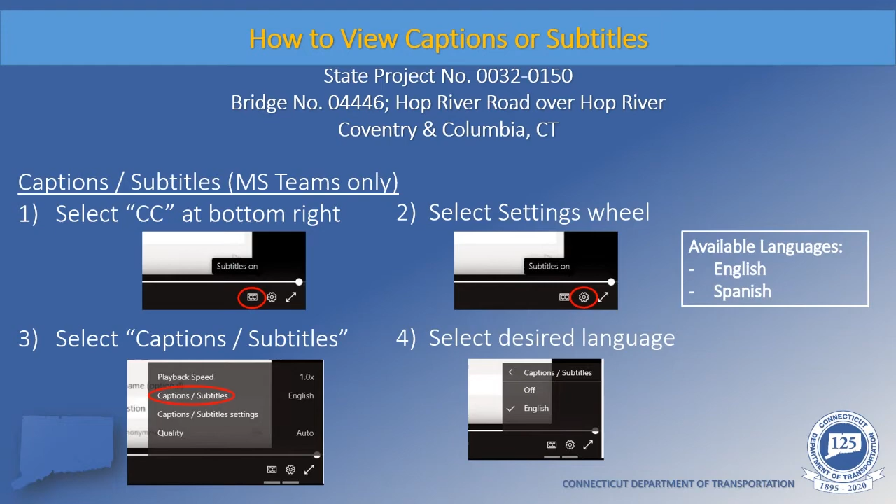Good evening, ladies and gentlemen. On behalf of the Connecticut Department of Transportation and the towns of Coventry and Columbia, it is my pleasure to welcome you all for attending this public informational meeting for State Project number 32-150, replacement of bridge number 04446, Hop River Road over Hop River, located in the towns of Coventry and Columbia. My name is Preeti Bhardwaj, and I am the project manager assigned to this job.

I am joined here this evening with my design staff, along with the towns of Coventry and Columbia, since this is a border bridge, to discuss our design proposal, which has been completed to a 30% level. We hope that you will find this meeting both interesting and informative.

I would now like to explain the format and agenda for tonight's meeting. I will be explaining how you will be able to interact with the project team. I will be explaining how this project is funded in the Federal Local Bridge DMS, or Design Managed by the State program. We will have some welcoming remarks by the town of Coventry. I will be introducing the project design team, and that includes the department's front office leadership, the department's design team, and our consultant liaison engineer team.

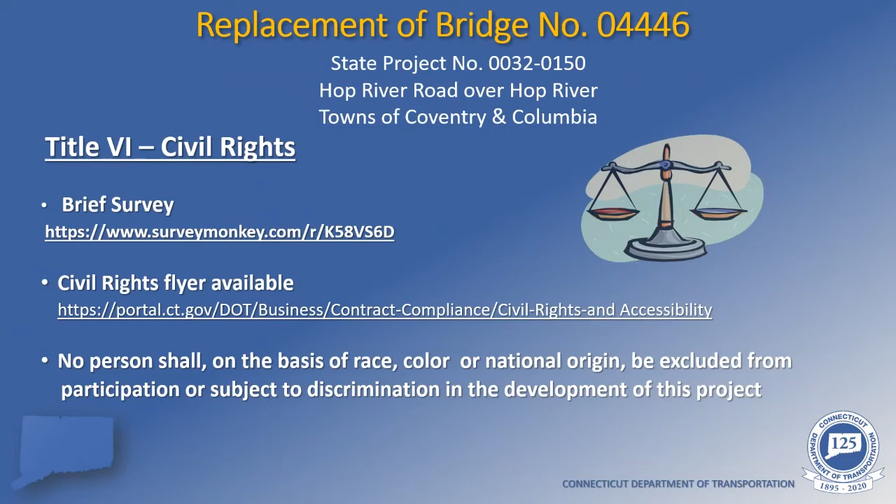I would now like to explain how this project is being funded. This bridge is a town-owned bridge and is being funded under the department's federal local bridge program. Traditionally in this program, the town selects a designer, and because federal funds are involved, the department provides administrative oversight because the department is considered to be stewards of those federal funds. The funding is traditionally 80% federal and 20% town for the design, rights-of-way, and construction phases of the project.

However, this project is going to be funded under the department's newly launched DMS, or Design Managed by the State program. In this program, it will be the department who will be performing the design on behalf of the municipality, utilizing our consultant liaison engineers, who in this case are Close, Jensen, and Miller. Close, Jensen, and Miller has completed the 30% preliminary design, and it will be brought to final design completion by one of our pre-selected task-based designers.

In addition, the design phase only will now be funded with 80% federal and 20% state funds. So the entire design phase is at zero cost to the towns of Coventry and Columbia. Although the 30% preliminary design was performed by the department, it was in full partnership and coordination with the towns of Coventry and Columbia. We held several meetings with both towns and diligently worked together to incorporate most of the town's comments and concerns. And now we are reaching out to you, the community, to also weigh in.

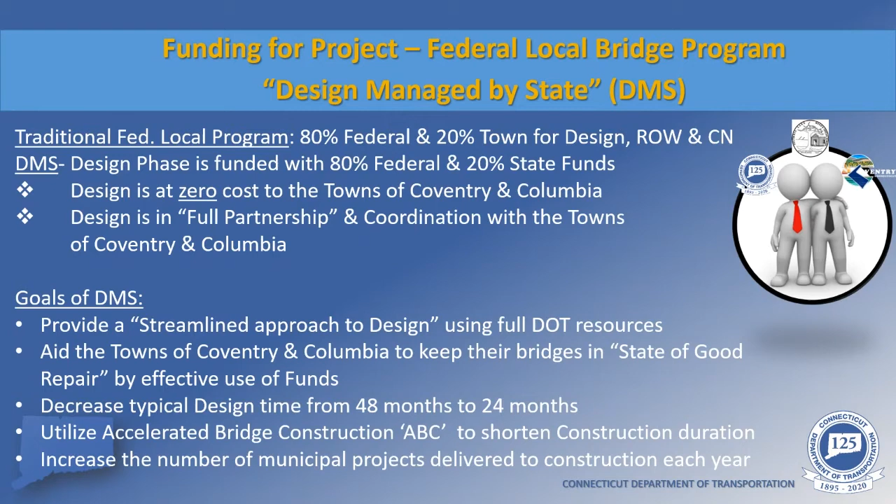Hello and good evening. I'm Todd Penny, the town engineer and wetlands agent for the town of Coventry. I am serving as the project liaison for both Coventry and Columbia for this project, giving my expertise and experience with these types of federally funded transportation projects. It's my job to coordinate with ConnDOT and Close, Jensen and Miller throughout the project and make sure the goals of each community have been met.

ConnDOT performs safety inspections on all bridges over 20 feet in length at 2-year intervals. The inspection reports for the Hop River Bridge identified several costly maintenance repairs, including bearing pad replacements, deck drainage, approach retaining wall voids, partial repaintings, along with other necessary repairs. While these deficiencies do not result in immediate dangers to the traveling public, their repairs are expensive, and the two communities have been searching for state and federal funds to assist in implementing the repairs since 2013.

In December of 2018, the towns made an application for the 2019 Federal Local Bridge Program for the bridge's replacement under the qualification of the bridge's functionally obsolete rating, a 1-lane bridge for a 2-lane roadway, along with the inspection report repairs. We took this approach as the required 20% municipal match for the replacement of the bridge was comparable to the local funds needed to repair the existing 1-lane structure.

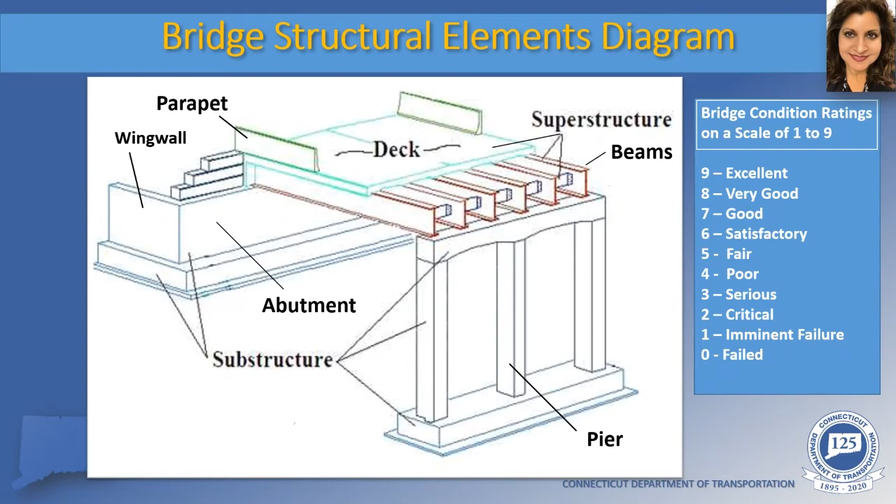Now that you are armed with basic bridge knowledge, I would now like to introduce Mr. Daniel Carnine, who will be presenting the technical portion of the presentation. Good evening, my name is Dan Carnine from Close Jensen Miller. I will present the technical portion of tonight's presentation.

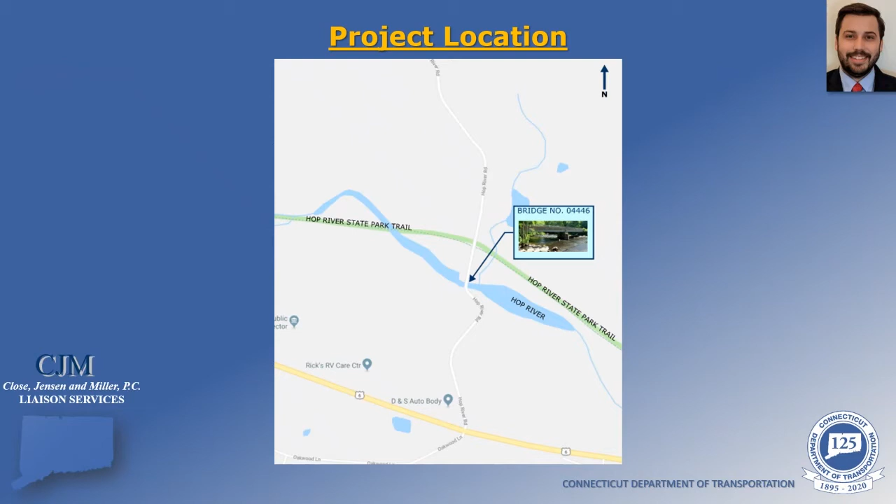Bridge number 4446 carries Hop River Road over the Hop River. The bridge is located 0.3 miles north of Route 6 on the Coventry-Columbia town line. Here's an aerial view of the site with the bridge in the center. On top to the north is a parking lot to the Hop River State Park Trail. To the west, upstream from the bridge, is a dam. And to the southwest, the Hop River Dam tail race branches off the river, then continues east under Hop River Road.

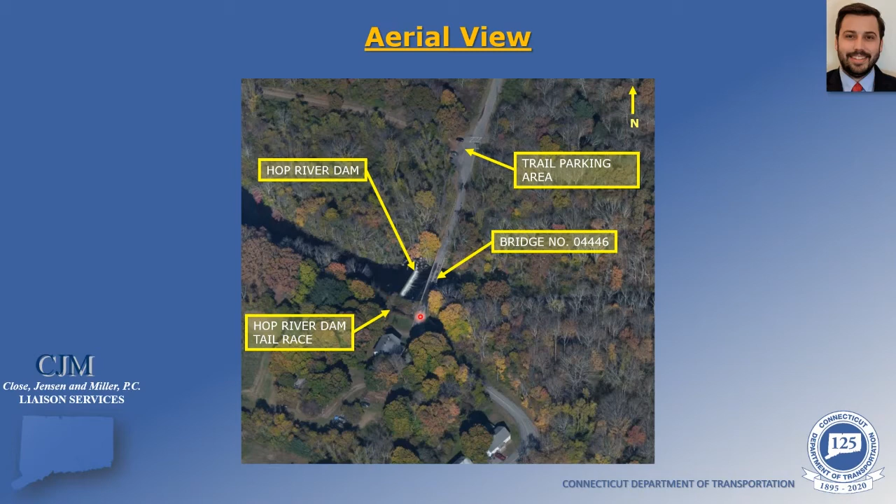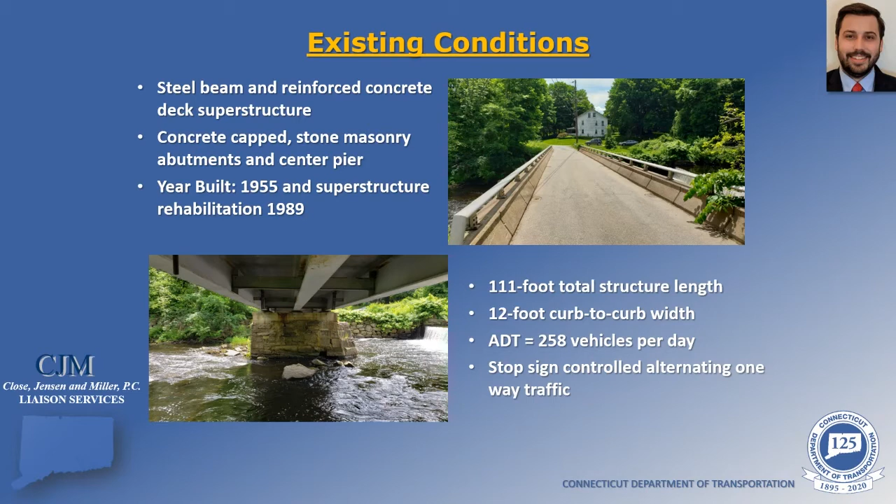The existing bridge consists of steel beams and a concrete deck superstructure supported by stone masonry abutments and a center pier. The bridge was originally built in 1955 and rehabbed in 1989. The structure has a total length of 111 feet and a curb-to-curb width of 12 feet. There are stop signs at each end of the bridge providing alternating one-way traffic.

The deck, which was replaced in 1989, is in good condition overall with minor deterioration. However, the deck width is functionally obsolete since it is too narrow for the current average daily traffic.

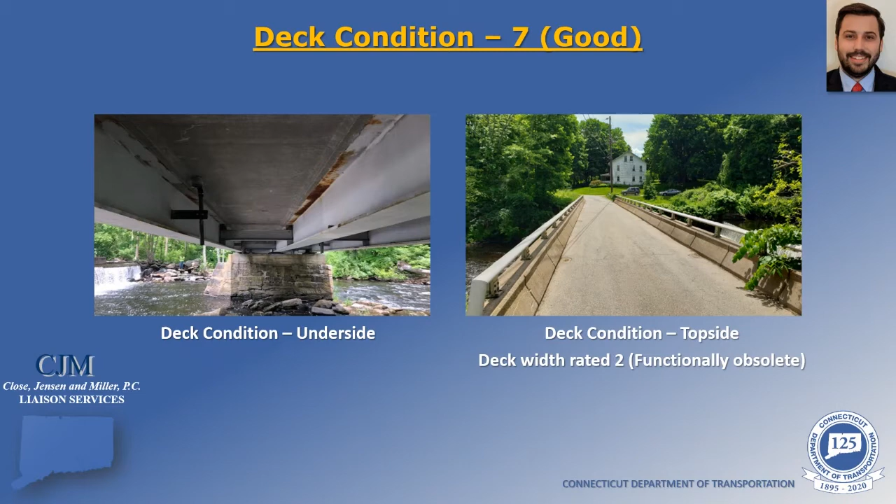The superstructure is in fair condition overall, with some deterioration in the beams. However, the existing steel expansion bearings are structurally deficient, show heavy signs of rust, and warrant replacement.

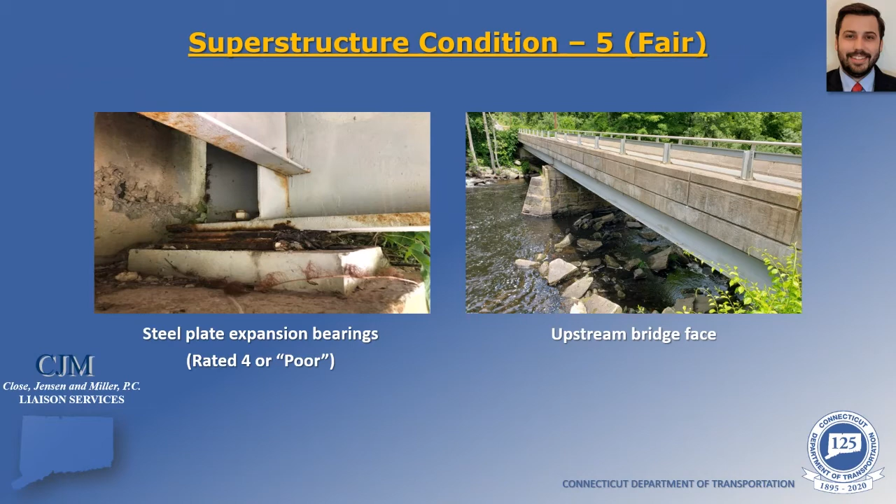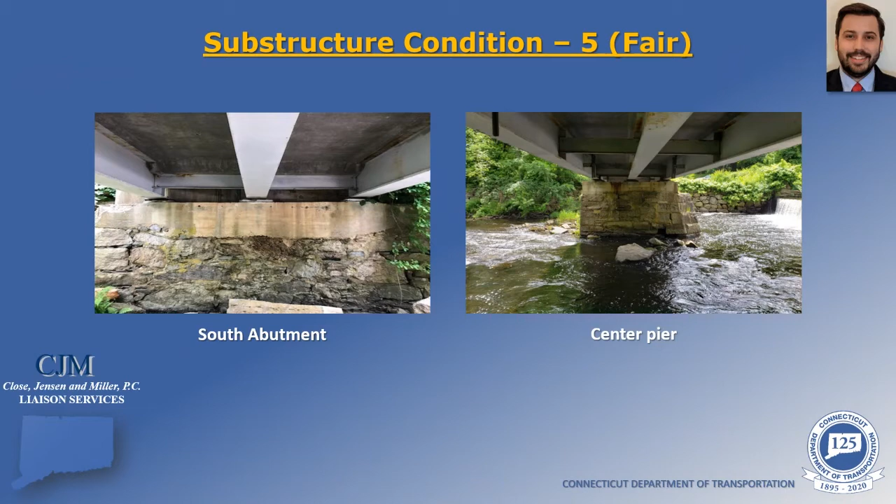The substructure is in fair condition, with some deterioration and voids in the stone masonry. Here you can see the typical substructure condition, with the south abutment shown in the left picture and the center pier shown in the right picture.

Due to the functionally obsolete deck and deteriorated bearings, a full bridge replacement is required. The bridge will consist of a steel multi-girder superstructure on integral abutments.

This is an elevation view that shows the side of the proposed bridge. The span will be increased to 130 feet to allow construction of new concrete abutments behind the existing stone masonry walls. The top portion of the existing abutments and a small portion of the stone masonry walls will be removed to make room for the new superstructure.

The existing stone masonry pier will remain, but a new reinforced concrete cap will be constructed on top of it. On the left of the screen, you can see the culvert that carries Hop River Road over the mill tail race stream, which will be replaced with a precast concrete box culvert.

On top of the bridge, open metal bridge rail will be used across the structure and terminate into reinforced concrete end walls at all four corners of the bridge.

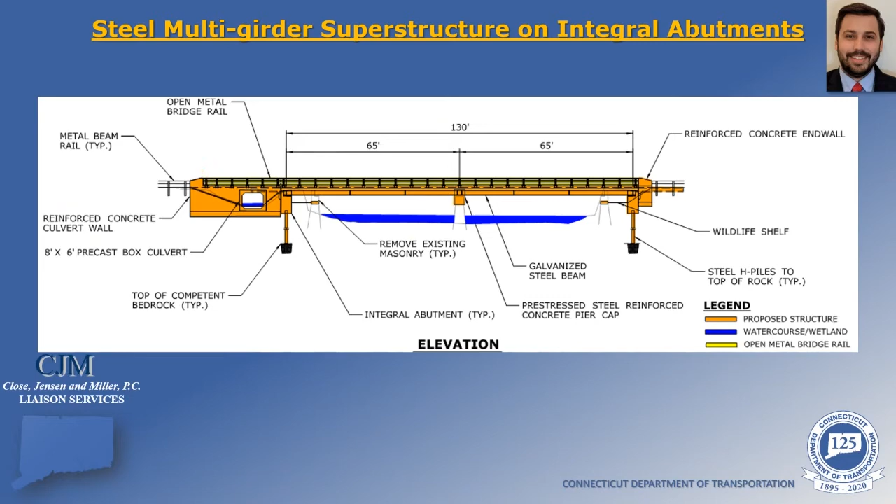The reinforced concrete end walls located at all four corners of the bridge will be covered in stone facing. Here are two pictures from recent projects to give you an example of what the end walls would look like.

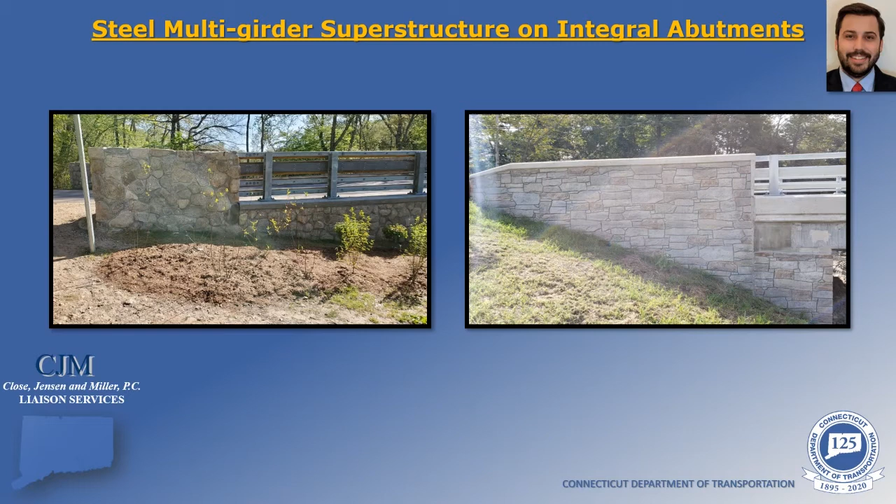Here is a cross-section cut of the proposed bridge. The road will be widened from 12 feet to 24 feet to allow 2 lanes of vehicular traffic.

On top, in yellow in the picture, open metal bridge rail will be installed across the entire structure. Below that, you can see the concrete deck in gray and the steel beams in orange.

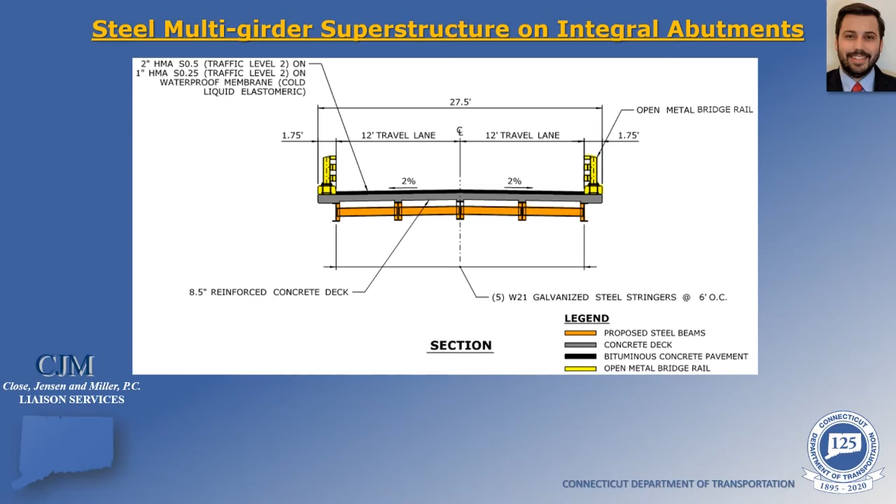Here are pictures from some recent projects to give you an idea of what the proposed superstructure would look like. The top photo shows steel beams covered in a galvanized coating, and the bottom photo shows open metal bridge rail.

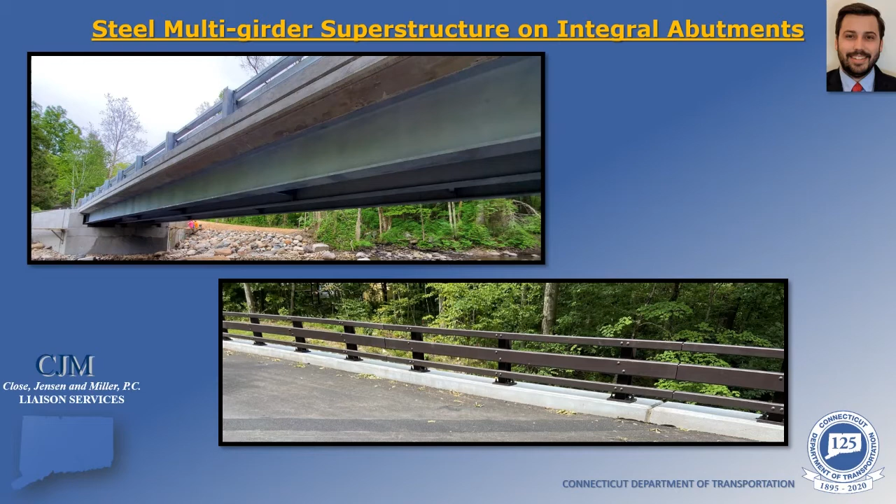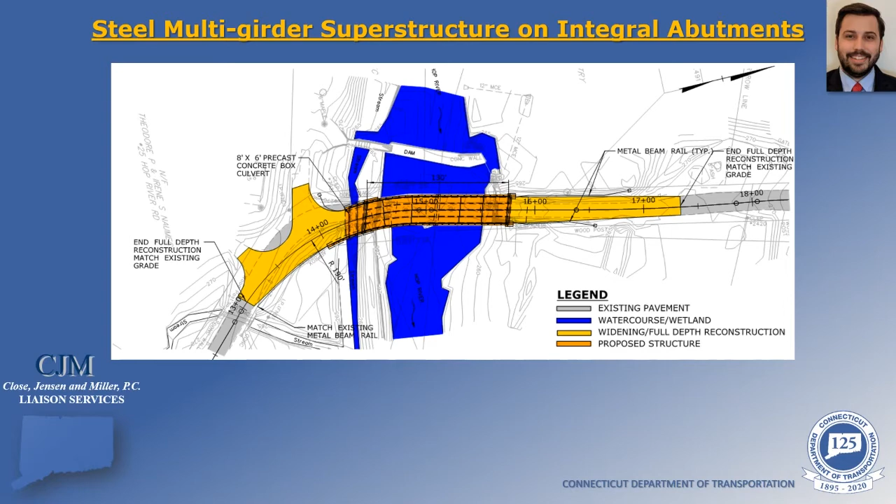The roadway profile for Hop River Road will be slightly modified to allow a slight slope across the bridge. Some fill will also be placed on the north approach to reduce the sharp angles and bumps.

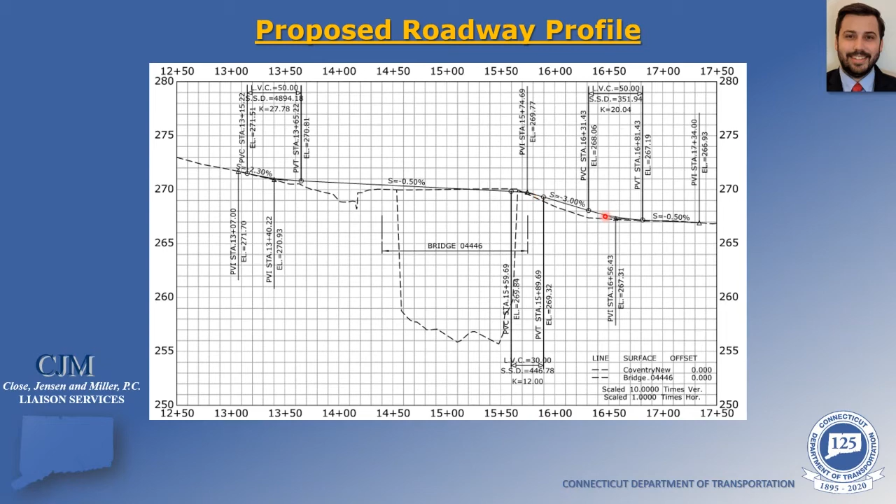There are overhead utilities over the bridge, shown here in red. They will be temporarily relocated during construction, and we do not anticipate any interruptions to power, phone, cable, or internet service throughout construction.

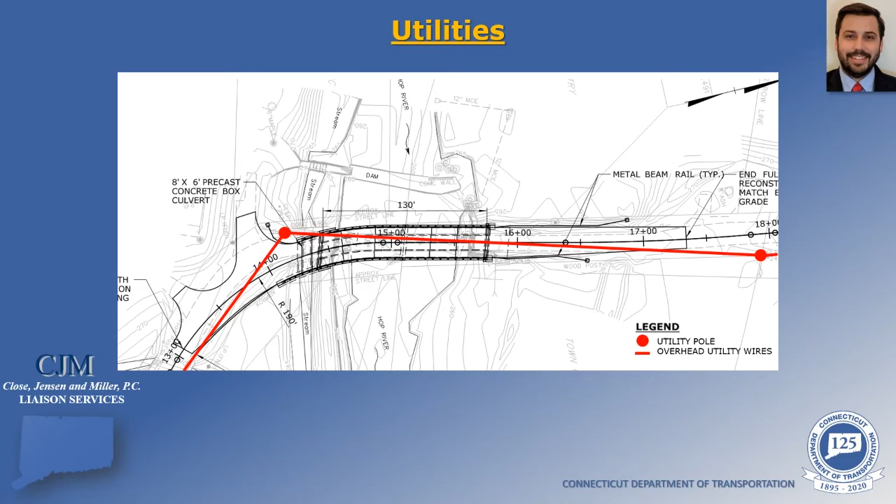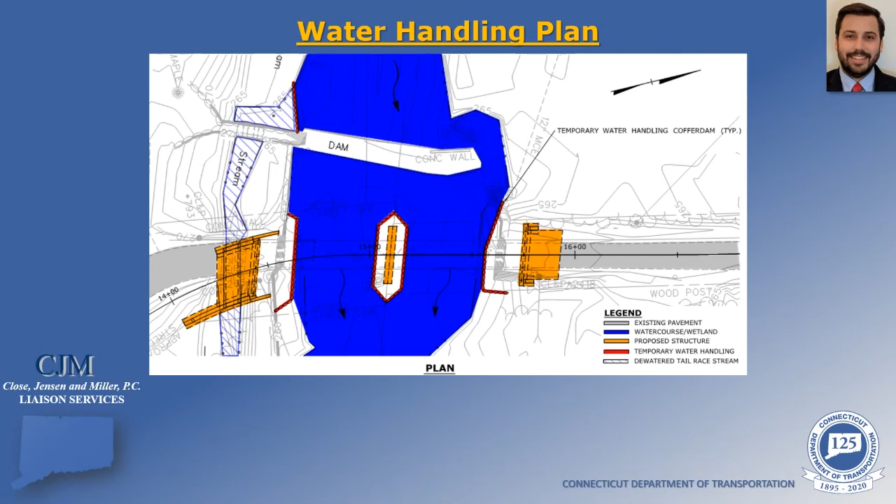During construction, temporary water handling sandbags will be placed around the existing substructure, and impacts to the river channel will be minimal. Sandbags will also be installed at the inlet for the tail race, and the stream will be dewatered for 1 to 2 weeks to allow for the replacement of the culvert.

Construction will utilize a 6.8-mile detour consisting of state and local roads. Vehicles following the detour from Hop River Road would take a left onto Route 6, a left onto Pucker Street, a left onto South Street, a left onto Bunker Hill Road, then a final left back onto Hop River Road.

Access to adjacent driveways will be maintained at all times throughout construction.

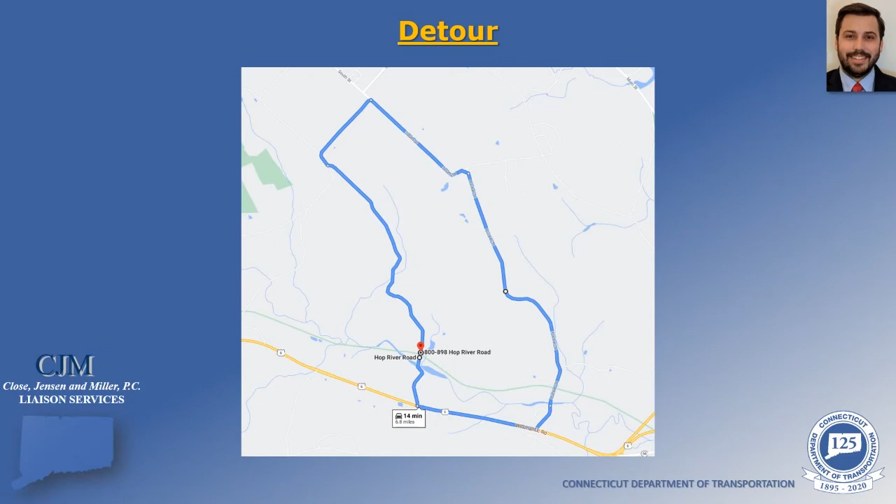Because of the roadway widening, permanent partial takes, shown here in red, will be required to the north in Coventry and to the southeast on the Columbia side.

Temporary construction easements, shown in green, will be required from private property for certain construction activities like the installation of sandbags at the millstream inlet. The rights-of-way process is just beginning, and DOT rights-of-way will explain this process more later in the presentation.

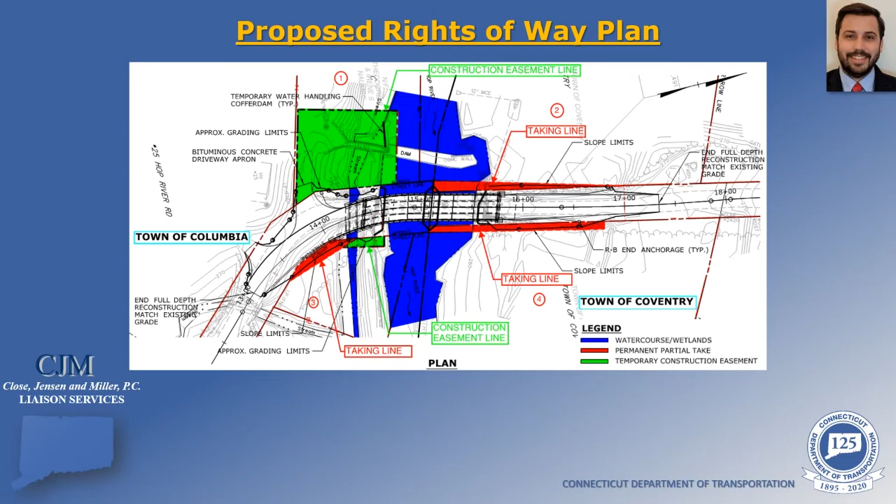We will obtain all necessary permits for this project. We anticipate obtaining Coventry and Columbia Inland Wetlands permits, Army Corps of Engineers general permit, and a flood management certification.

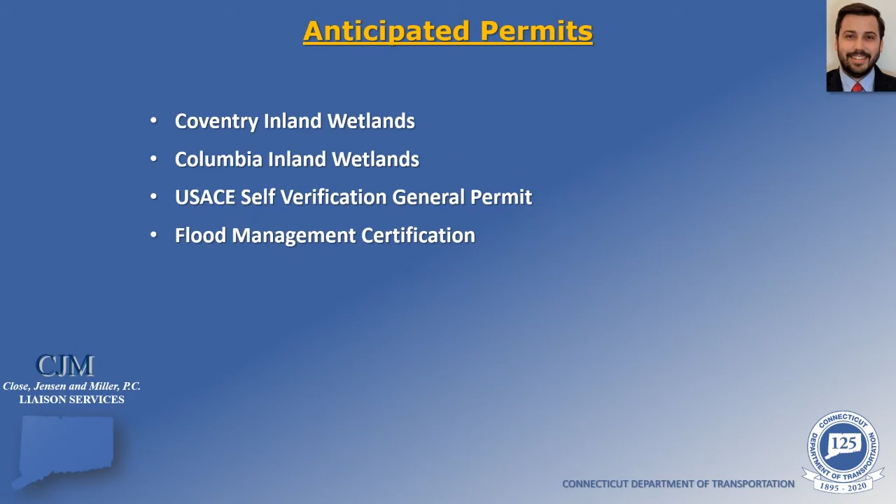The proposed construction duration for the project is 6 to 8 months, with an anticipated construction start of spring 2022. Construction will be funded by 80% federal and 20% town funds. The estimated construction cost is $3,350,000, with a municipal share of $670,000.

This concludes the technical portion of tonight's presentation. Thank you.

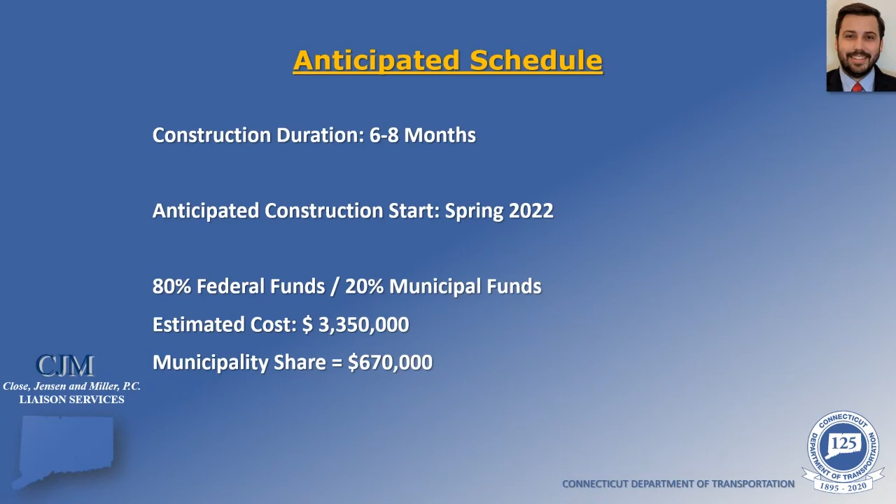Good evening, everyone. My name is Dennis McDonald, and I'm a representative from the Connecticut Department of Transportation, Division of Rights-of-Way. I'm just going to provide a brief overview of the right-of-way process.

The function of the Division of Rights-of-Way is to acquire all property and property rights necessary for the project. This is done in accordance with Connecticut General Statute Section 13A-73, 13A-98E, and the Uniform Relocation Assistance and Real Property Acquisition Policies Act of 1970, as amended.

The typical right-of-way impacts include partial acquisitions, easements, and rights. Impacts are subject to change as the design progresses, but this gives a general idea of typical property impacts.

Once property impacts have been established, each impacted property owner will receive a letter of intent to acquire along with a property acquisition map. The letter essentially initiates the right-of-way process, and the map provides a detailed overview of the specific right-of-way impacts. Soon after the letter is received, the valuation process will take place, and once a value has been established, each impacted property owner will receive a written offer of compensation.

Property owners will be given time to consider the offer and negotiate should they wish. If an agreement is reached, an acceptance document will be signed, and a closing will take place at a later date. If an agreement is not reached for whatever reason, the state will utilize its power of eminent domain and acquire the property rights through the condemnation process.

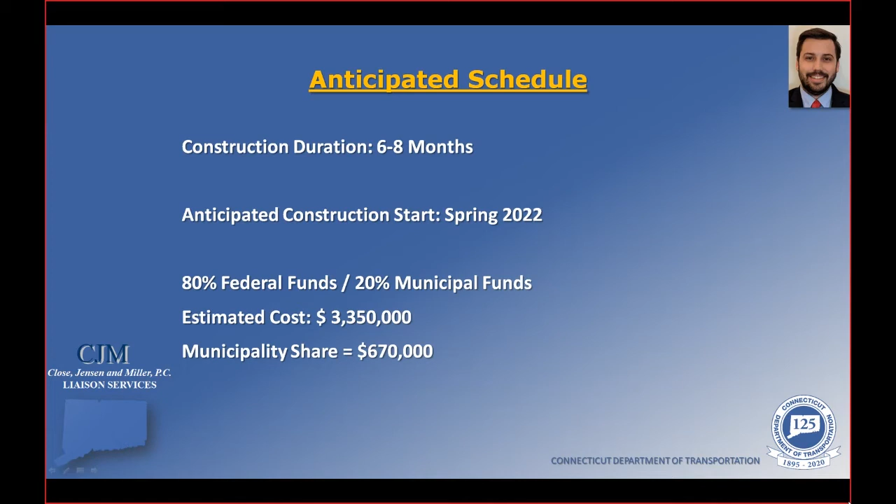Sure. So construction is anticipated to start spring 2022 with a construction duration of 6 to 8 months. During construction, we do anticipate using a detour during that time. As we mentioned before, the detour is 6.8 miles long, and we'll use state and local roads.

Okay, thank you very much. Next question. Was a full replacement of the bridge investigated? Dan, can you please take this question as well?

So for our proposed structure, we did investigate a full replacement, and we are proposing replacing most of the existing bridge, which includes the top superstructure portion, the abutments, and we're building new end walls. However, we did decide to maintain that center pier, not only because we wanted to maintain the existing site aesthetic conditions, but the pier is also in fairly good condition overall. So we felt that there was no need to replace that portion of the bridge.

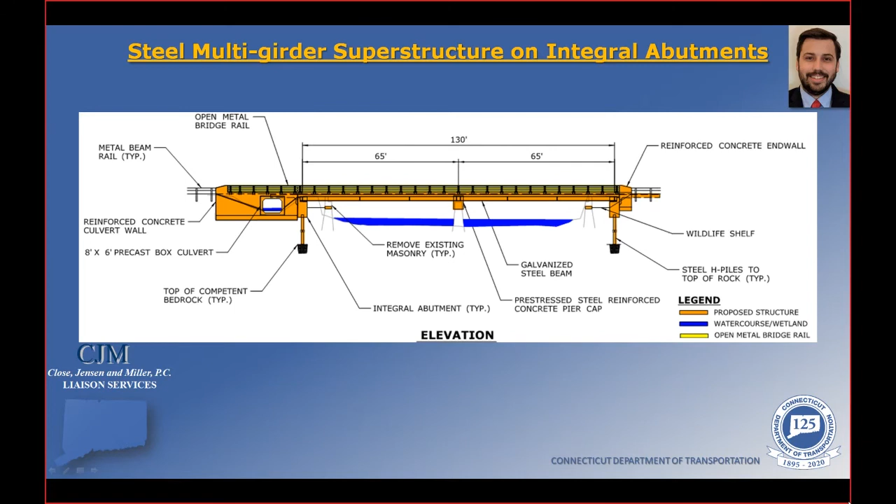Okay, thank you very much. We have another question. Will the new bridge be wider? Dan, can you please address this question? Yep.

Thank you, Dan. We have another question. Where will the contractor place his equipment? Dan, can you please take this question?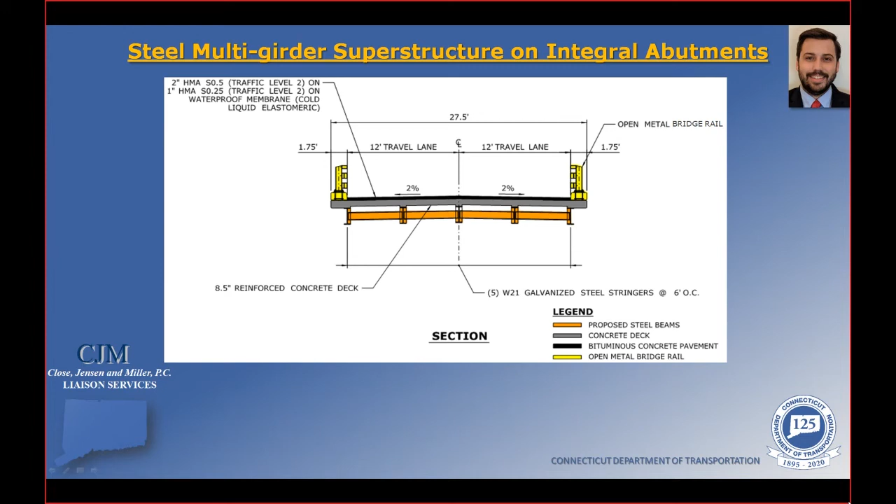Yep. So because construction is utilizing a detour, the contractor will most likely store equipment on the closed section of the road.

Okay, thank you, Dan. We have another question. Will the entrance to the trail be affected? Dan, would you like to take this question?

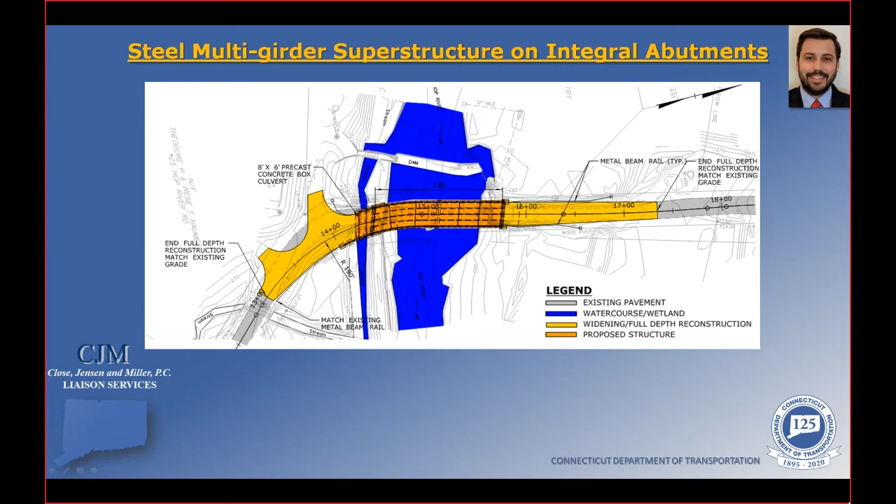Yeah, the trail parking area located to the north of the bridge, we don't anticipate any closures to that parking lot or that trail access point. However, the parking lot will have to be accessed from Hop River Road, from the top portion of the road from the Coventry side, once the detour has been installed.

Okay, thank you. All right, we have another question. Will mail delivery be impacted? Can I have Dan please take the question, and if any of the towns would also like to weigh in on this as well.

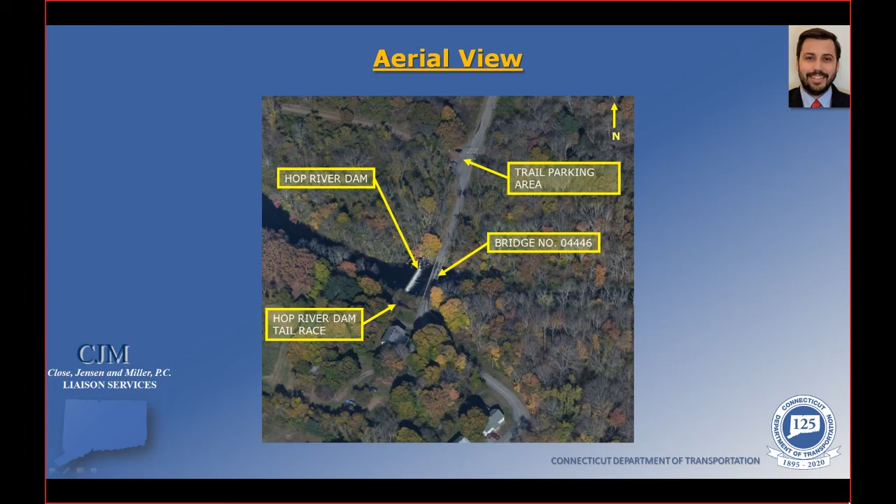Right, so for all these projects, especially where we're having long-term closures and detours in place, we always make sure to coordinate with the towns, and then through the towns, we coordinate with the post office, emergency services, and schools to notify them of when the detour will be installed and where the detour will take place. This will give time for those entities to plan ahead and be able to provide service to properties on both sides of the bridge.

Does anyone from the town like to take over?

Yeah, Dan, this is Todd Penny, the town engineer in Coventry. We do have property owners north of the bridge on the paved section. There's a few families that actually get their mail from Columbia's post office, and we will need to have that coordinated. We had to do that for the soil borings that were done, and we'll continue that coordination for the duration of the bridge replacement.

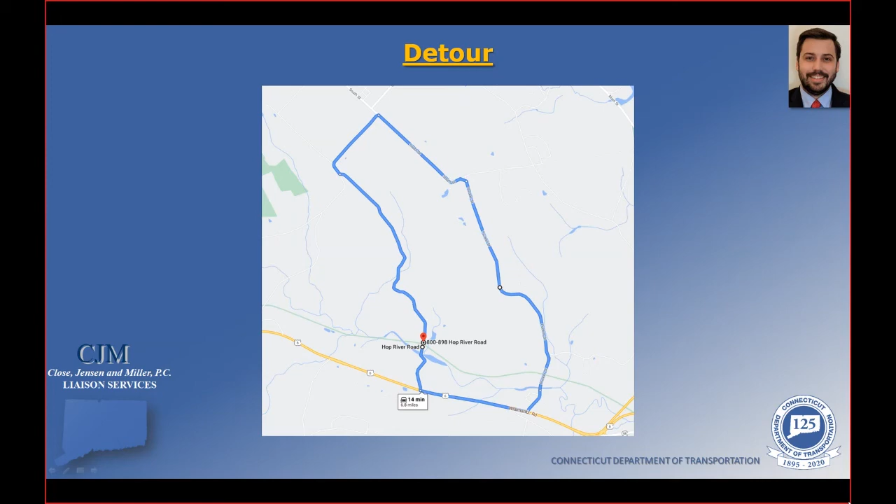Todd, would you like to add anything? Yeah, I would echo that, Dan. We've had some preliminary conversations with our EMS staff, and that will continue to progress, along with Columbia's emergency response teams, so we'll continue that coordination before we finalize and finish the construction documents.

This is John Elsesser, town manager of Coventry. If I can add, this is the same detour that was used about 31 years ago.

Alright, thank you very much. We have another question: will it be possible to elevate the shoulders to make a sidewalk on which a fisher person or sightseer can stand on the bridge safely?

Dan from CJM, would you like to take this question, and would the town also like to weigh in? This is Dan, CJM. We understand this is a very heavily traveled area, and there are a lot of people that do stand on the bridge. As part of this project, since we are widening the road, we will be providing additional shoulders on each side of the bridge to provide more room between the curbs on top. We don't have any plans right now to elevate the shoulders or provide sidewalks.

We usually don't provide sidewalks when there aren't a lot of sidewalks off the bridge, or if there are no future plans for sidewalks. So for now, we just wanted to provide more room to make it safer than the existing condition.